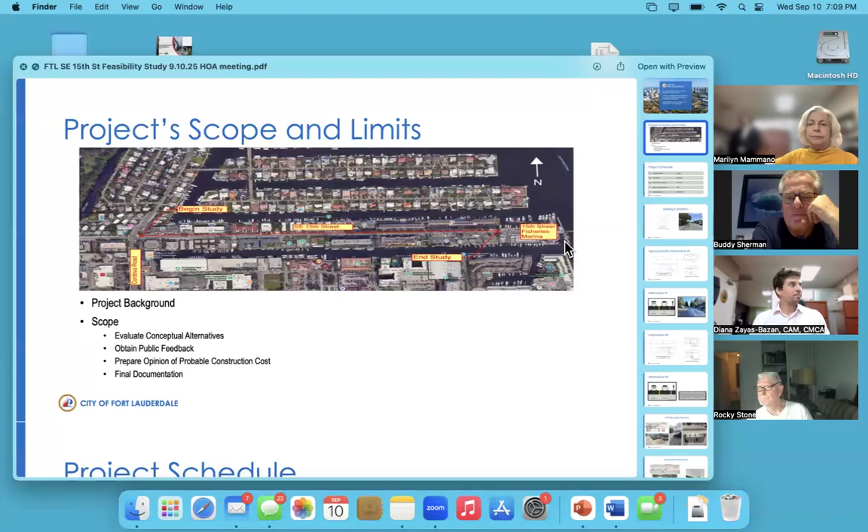Next slide, please. So as far as the project schedule goes, we are actively evaluating alternatives. We're here today to present our findings so far.

There is a public involvement meeting on September 30th. Milos mentioned that that's the first official time that we will be getting, I guess, votes, right? There will be another public involvement meeting at a date to be determined once we gather all of the feedback over the next couple of weeks.

We'll decide on when to have the second one, and then finally, after that process is completed, we will put together final documentation for the study. Next slide, please. So it's kind of hard to see.

The slide that you see on the screen shows the existing condition. The city owns 50 feet of Southeast 15th Street. If you think of it, there are 2 travel lanes, each travel lane is 10 feet.

So there is 15 feet on each side that are currently occupied by something. In many cases, it's parking. In other cases, it's green areas. In some other cases, it could be sidewalk. So we are working within a very tight corridor that is constrained by features located adjacent to the road, and we'll go into alternative evaluation, typical sections, or kind of potential options this could look like, and try to explain what we're seeing in different areas of this corridor.

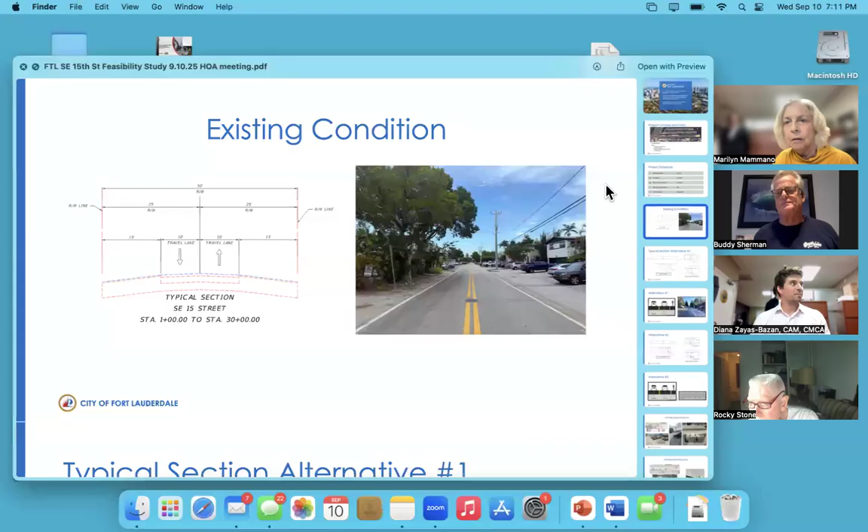So the alternative that we are evaluating is to add a path. Again, the area is very constrained with parking, so we've evaluated several different alternatives that involve shifting the road, doing different things that are very impactful from the perspective of parking, as well as the landscaping and other physical features like utility poles and things like that.

So what you see here today are the two least impactful alternatives when it comes to the residents. Our proposal is to provide a 4-foot paved path that would connect different areas. We have some boards here in the back that illustrate existing sidewalk that is sparse throughout the corridor, and how we plan to provide a path that connects different parts of Southeast 15th Street to each other.

So in some cases, what we will need to do is essentially delineate the 4-foot path by adding striping and doing some milling and resurfacing of the asphalt. In other cases, where there is green space now, or unpaved areas used for something else, those will need to have additional 4 feet of asphalt added so that the path is continuous throughout the entire limit.

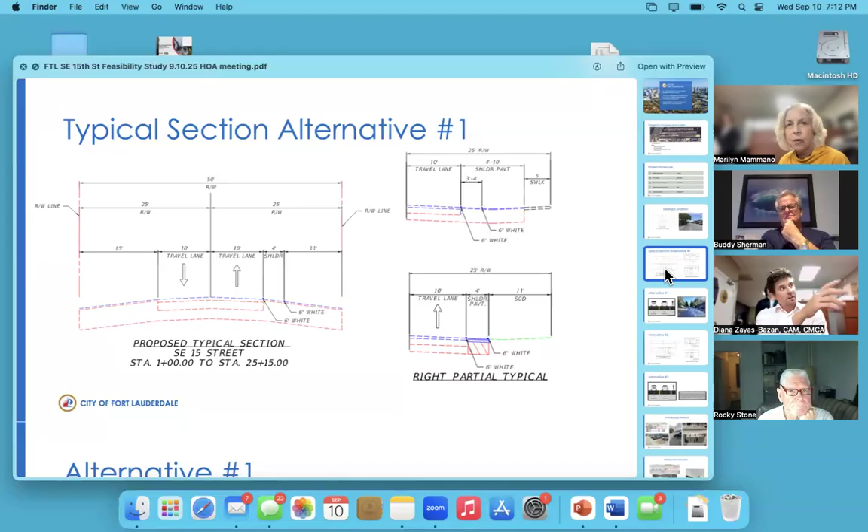So this first alternative - next slide, please. Here's an illustration of how this could potentially look in real life application. On the left, we have a cartoonish graphic that represents the two-way road that Southeast 15 is today, and a 4-foot separated path that pedestrians would be using. The picture on the right shows a similar condition from another state, and this is how it potentially could look in the future if the project moves forward. So that's the first alternative that we have.

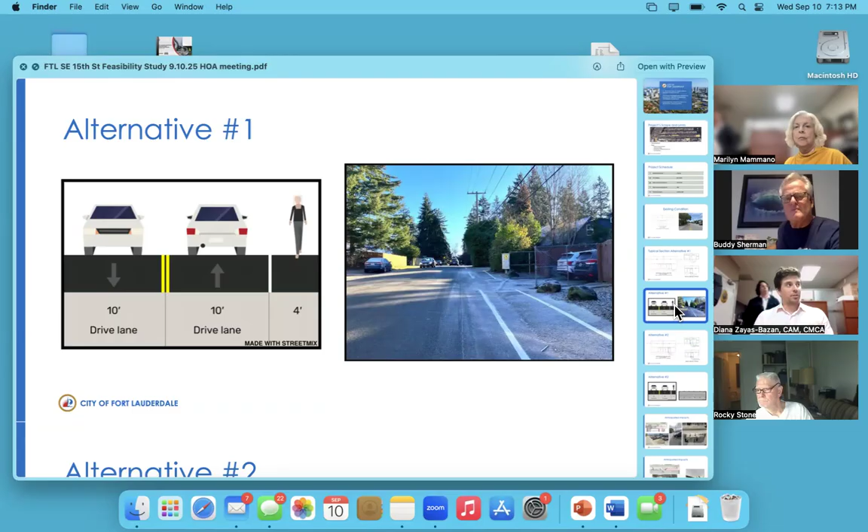The second alternative is a bit different. I'm sure you have driven on express lanes along I-95 - there is a separation between the general purpose lanes and the express lanes, right? The idea here would be similar: to provide a separation for the path between the travel lane and the surface where pedestrians would be walking. We're proposing a 5-foot path under this scenario, but again, this option is more invasive and more expensive, and we'll get into potential scenarios involving impacts to different parts of Southeast 15th that we need to be mindful of.

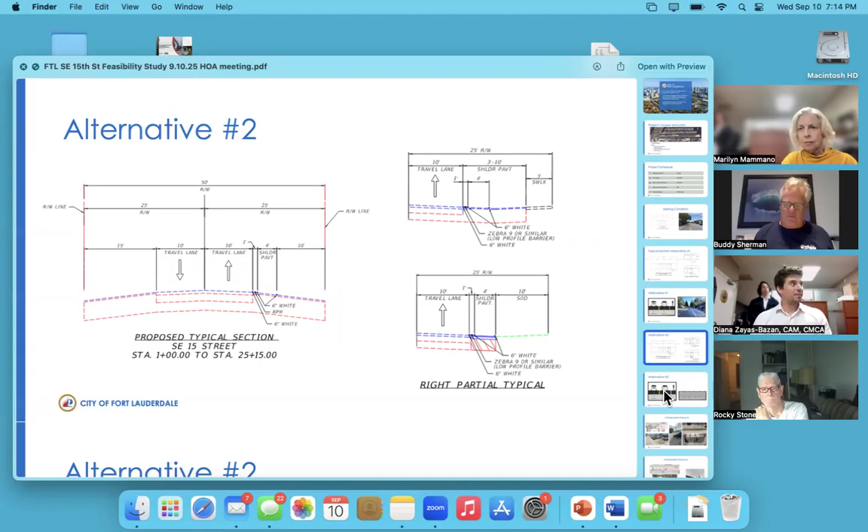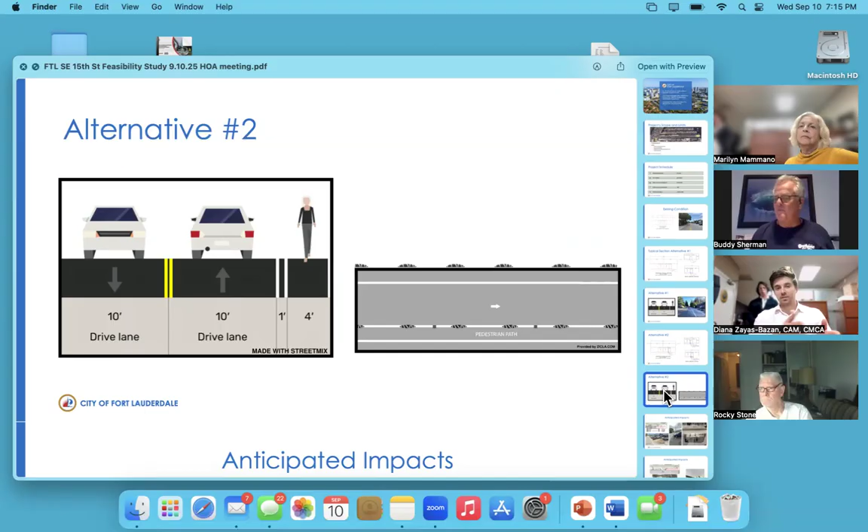Next slide, please. So this is how alternative 2 could potentially look. Again, we see the two travel lanes each, and then a separation, which will be 2 white stripes - kind of like the express lanes divided from the general purpose lanes. In some locations, we could also propose adding a small separation which we call zebras - a rubber armadillo that extends approximately 2 inches from the ground. I don't want to say it prevents cars, because if you want to drive over something like this, you can, but it's an additional measure that separates the travel way from the pedestrians.

Next slide, please. So the next few slides will cover anticipated impacts that we're seeing in all alternatives. We're here to seek feedback - by no means is this presentation final, and we need help from residents to be on board with the improvements being proposed, because without the residents' help, this is very difficult to accomplish.

So the first area we're looking at - this is very early on - just east of Cordova, Norwich Apartments, there is a dirt area currently being used for parking. From the pictures and our field review, if we were to provide a path here, we would be asking for help from the association to shift the parking spots farther to the south. We're not proposing to eliminate the parking spots; we're just trying to accommodate everyone within the available space we have. We went out to the project area several times to do our own research, and just recently with Milos to see if there's room to accommodate the shift, whether it's 4 feet or 5 feet. That's to be decided, but there seems to be room that goes towards the building.

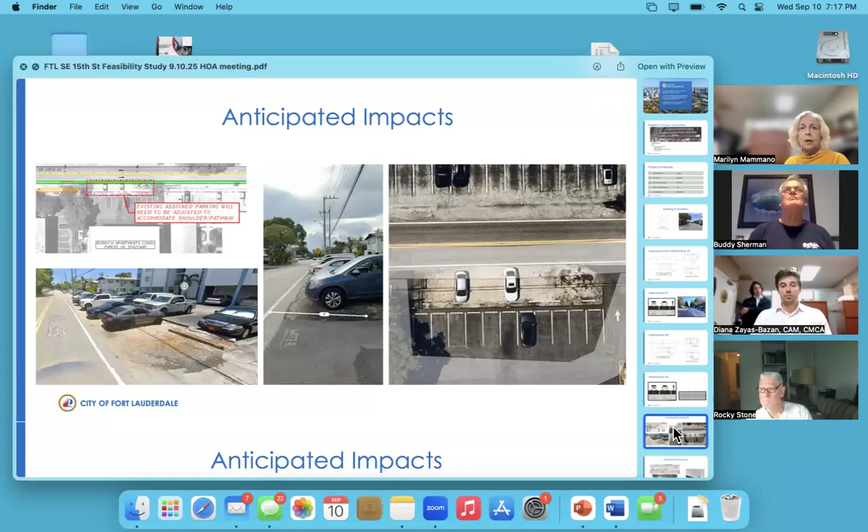I can't see the comment. What are you looking for? Landscape, no, can you see? Yeah, can you see the condo name? The name of the Marina Del Mar condominium parcel.

This is, let's say, the most complicated area of the project: the Marina Del Mar condominium. What's going on in the area is there is tandem parking, and you can see from some of the pictures, we were there on several occasions, there are sometimes cars that park right against the travelway or in the travelway, depending on the length of the cars.

So in this area, what we propose to do, but again we'll need collaboration from residents in terms of parking, is to reduce the path in all alternatives to 3 feet, which is the minimum allowable for walkability. By doing so, we're trying to minimize the impacts to the residents in the area. We're still keeping the tandem parking and providing the continuous path to go through this area.

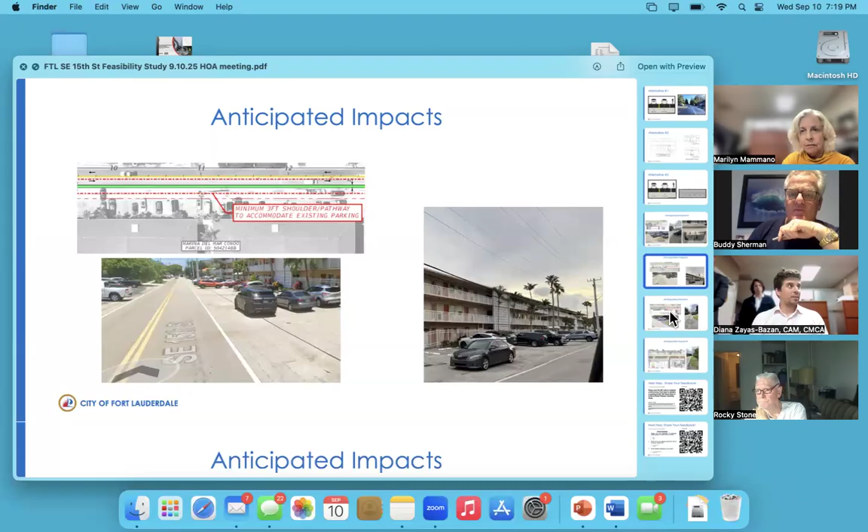No, I can see. There's no name on this. Oh yes, Caravel condominium. So this is another area of Caravel condominium, maybe the view and look, see the whole thing. Yeah, but no, he can't do it. I'm continuing, okay, I'm doing it. Don't mess with the screen.

So again, collaboration from residents is in play in this area. We did not see tandem parking here, but as you can see from the picture on the bottom left, there is offset parking from, I'm guessing, the sidewalk that leads into the inside of the condominium, and the car is not perfectly aligned with the wheel stop. So even if we do the path and the car doesn't park the way they should be parking, it's going to be an issue.

Not even parking—there is, let's say that there is parking, everybody parks wherever they can. I know, thank you, just saying. So again, it's a community effort to get this done. We as engineers can imagine things and we can design things, but if you just go ahead and park your car in the middle of the path, unfortunately, there's nothing we can do. Next, thank you.

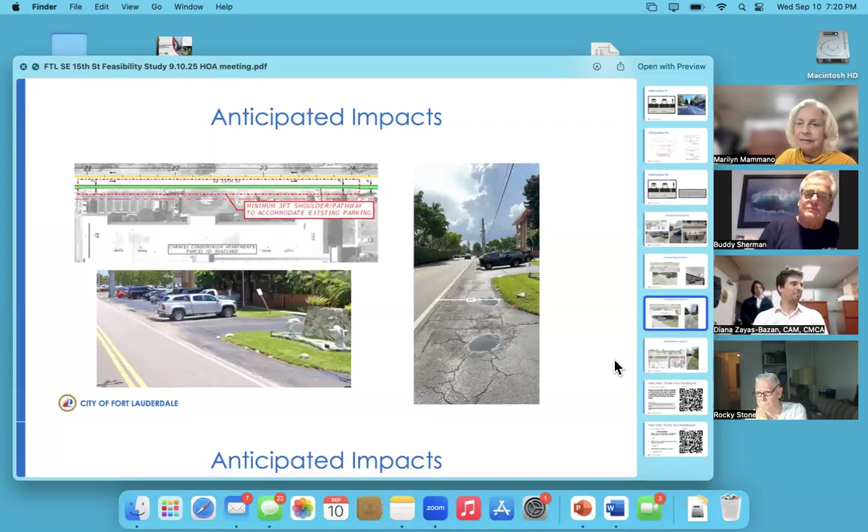Next slide please. This is landscape, I think. Yes, this is landscape, I'm just not sure—Oz Marine LLC. This is the one that's got the grassy area right in front. So this area currently is all grass.

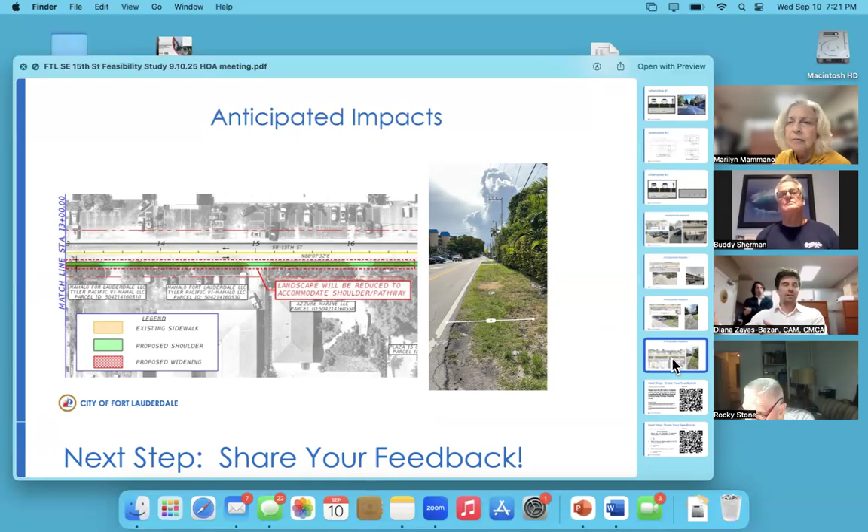In this scenario, one that I was explaining earlier, here we would actually have to add asphalt. We would have to add a path 3 foot wide and remove some of this sod area that's currently there. There is, in this particular scenario, one tree that will be impacted that's within the path, but it will not affect anything that's currently planted on the private property.

All right, so here we have our feedback request from you. If you scan the code with your cell phone camera, there are a couple of questions for you to answer, and some points for everyone to consider. The proposed pathway currently is on the south side, this is a continuous path, and the idea of the study is to focus on minimizing the impacts to the parking spaces.

Same thing with landscaping, right? We don't want to provide a very wide path in just one area and completely remove the grass that's there. We're trying to do as minimum as possible. And last but not least, there will be some impacts—it's unavoidable if the residents do want to have a walkable path, something will have to give.

If I may, before we go ahead and scan the code and you guys start giving your feedback, by show of hands, how many people live on Southeast 15th Street east of Cordova?

So in this area, and online, lots of the people are online. Lots of people online, perfect.

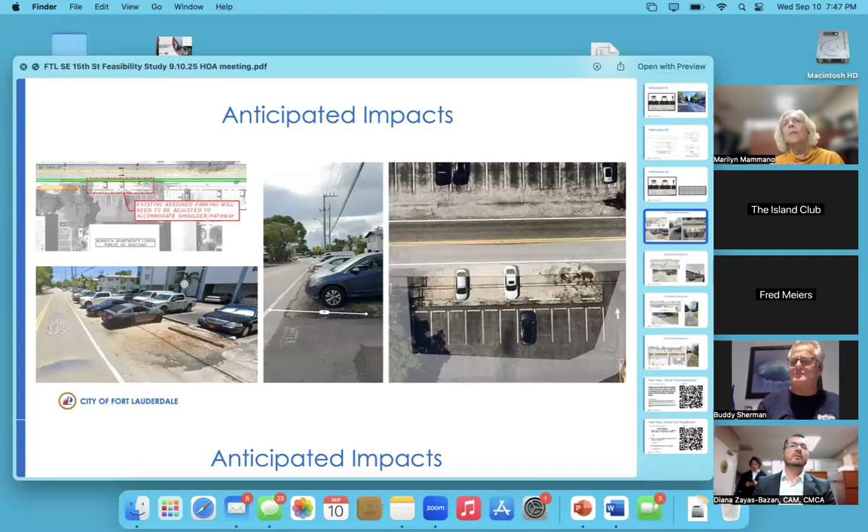I understand that, but I will tell you this - we have 2 Hondas. And if we pull right up to the stop, which is right up to the sidewalk by the door, 2 Hondas, not F-150s, end to end, almost come to the edge. Yeah, we will take a look at that. 1472. Yeah, we'll take a look at that.

I mean, 'cause if we do lose a parking space, what do we do with the value of the house? The goal is not to lose parking space. Well, that is the goal though. But if we take 4 feet, then you're gone. No, we'll work around that.

All right, they're committed to working with each condominium individually to make sure - I shouldn't put words in your mouth, go ahead, take over. No, you have to work with them. Yeah, absolutely.

So 1472, is that the very first on the north side? Let me just say - I walked up and down the street, I counted 133 spaces on the south side of the street. You're right, that would be impacted by your 2 plans.

Even with smaller cars, I don't see where you're even gonna get 4 feet, 3 feet you're talking about making it smaller in certain places. I just don't see it. How are you - you can't work with us. And I looked at each one. It's not just the ones you identified, the 1 or 2.

And I've lived there for 30 years. I was told we could have tandem parking when we moved in. What is that gonna do to the value of my property, to all of a sudden just have 1 parking spot?

So again, we will not be affecting, we will not be affecting any parking. You will not lose parking spaces.

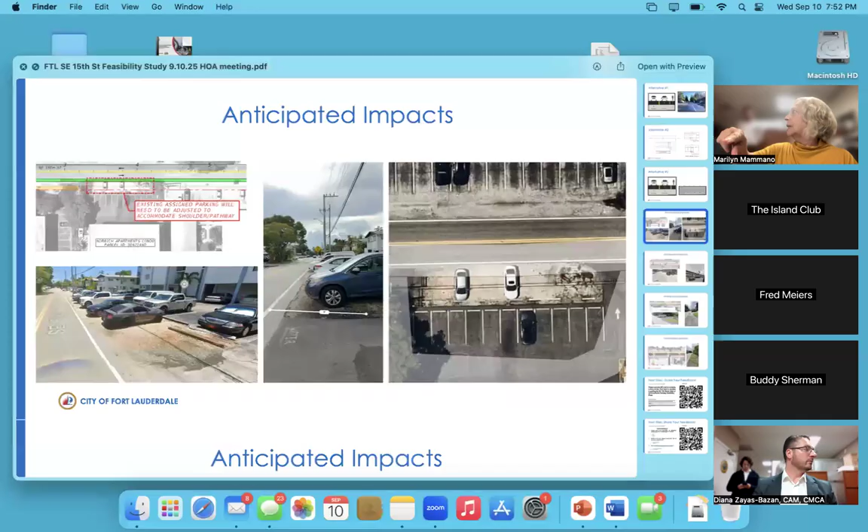One last question on this before we move on. Sure. Transportation, Vicky told me a number to call. I called twice, left my email and my telephone number. Transportation said that regarding these meetings, they'll call you back. Nothing, crickets. I apologize about that. What is the number that you called? And I'm going to leave you my cell phone number so you can call them. The email, it's the number on the flyer, the September 30th.

Oh, that's not good, I will take a look at that. All right, but I'm going to leave you my number. He says after a few rings, he says he'll call you back. Nothing, nothing. I apologize about that, I will look into it. And the absolutely last question, sir.

And there's 3 motorcycle cops sitting there. I'm so happy, I said, I cannot believe I've never seen a police motorcycle on 15th Street in 22 years. I was so excited, I said to my wife, should we go back and talk to them and see why they're never on 15th Street, ever?

On the other side of Cordova, heading down the launch ramp, the average speed is 60 miles an hour, with boats and trailers. All coming from federal. But anyway, sir, federal. Yeah, I apologize, you were right.

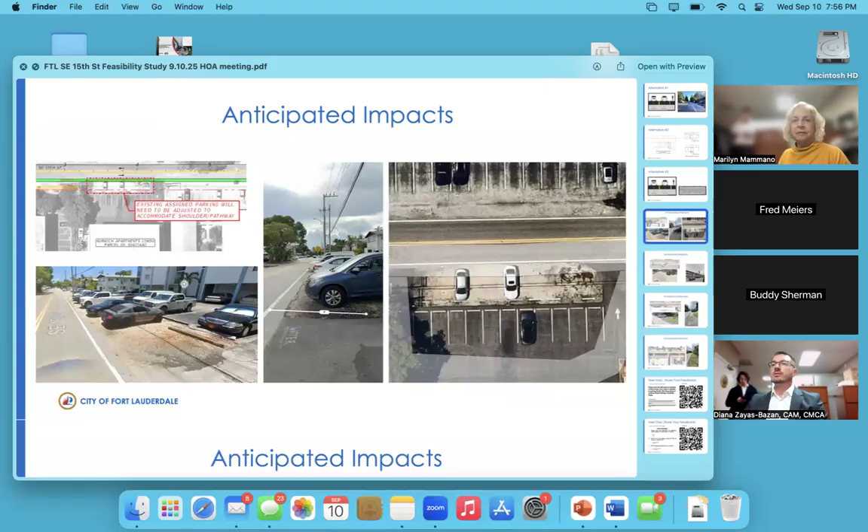Also, just one thing about September 30th: we have a very limited space in here, be mindful of that. We'll have a hybrid meeting with Zoom as well, we can accommodate up to 500 people on the Zoom. We're sending notices to about 645 property owners along Southeast 15, you should get it within a week or so. We'll put up yard signs, so please provide your feedback. The QR code that you scan takes you to our webpage with background and also 2 concept plans. Again, you have our commitment that we'll work together. We don't want you guys to lose any parking, but we want to figure out how we can make it safer. One option is do nothing, and one option is do something, but we'll work together on that.

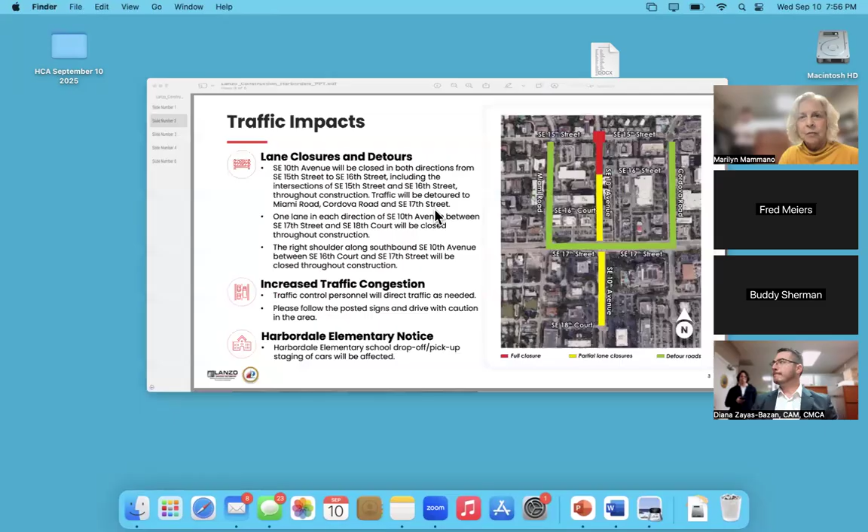Marilyn, yes ma'am, we need to discuss amongst ourselves together as an ad hoc and compromise, because each of you has great input here. But if we can come up with something that helps everyone together, let's try before that meeting. Yeah, I think we should do that. We'll work on it. As a group, as an ad hoc, homeowners association, we'll try and contact people we know and try to get a Zoom going and talk about it. Right, we'll do that.

As far as the scope goes, we're repairing and replacing some of the sewer pipeline that runs through the Harbordale neighborhood. We've already done a pretty substantial portion of open cut pipeline replaced on 15th Street over the summer, which also included some work on Miami Road. Thank you guys for your patience and understanding—we were able to do that during the school break, so everybody was really pleased, especially the principal over at Harbordale Elementary School.

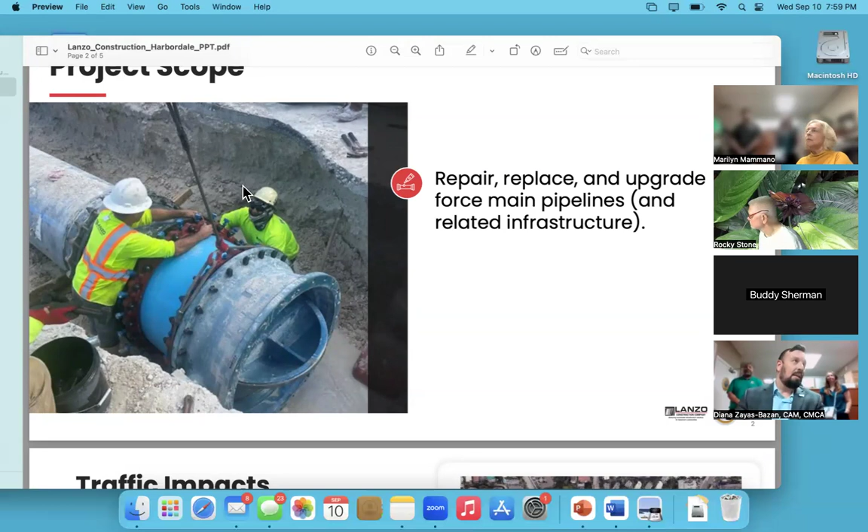We are going to be picking up another phase of the project starting next Wednesday, the 17th, that will also affect you. Marilyn has distributed some information with dates for when the work was going to start, but there's been a little bit of a delay in materials procurement and getting everything we needed to start the project. It was supposed to start at the beginning of the month—now it's going to start on the 17th, probably running through the end of the year.

Let's jump into the lane closures and detours. There's going to be a closure at the intersection of Southeast 15th Street and Southeast 10th Avenue, and some work with open pits extending south on Southeast 10th from 15th. There will be partial lane closures stretching the balance of Southeast 10th until you get to 17th, and then between 17th and 18th Court, again just partial lane closures. This is much more minimal compared to the open cut portion that was done.

Although now we have to contend with the elementary school, so their car line is going to be affected because it has to detour certain ways. We have a flyer that shows what it's going to do to the car line and where they're going to be routed, where the flaggers are going to be. We have some copies we'll leave with you, Marilyn, to distribute. The only thing I'd say is the date on it says from September to late October, but that's going to push back.